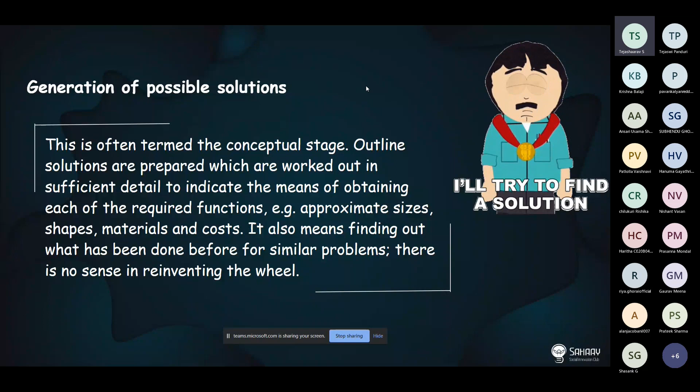It also entails researching existing solutions for similar issues, because there's no point in inventing something from scratch again. If someone has already worked on a solution and reached a conclusion—whether it worked or not, or was successful—it doesn't make sense to put in valuable time and effort into it again. Instead, we could just focus on getting better and more efficient solutions for the same problem statement. So we should look into the previously existing solutions as well.

Here, our problem statement is waste segregation, which we discussed in the last session. Now we'll look at the possible solutions for the problem statement: manual segregation, recycling or waste management applications, weight-based sorting, sensor-based sorting, and sorting with artificial intelligence and machine learning.

We'll look into the pros and cons of each solution—why this solution was considered, why this wasn't considered—in order to select the best one according to our desired specification. Then we'll have a mini brainstorming session if you have any other solution in mind.

All right, so now we'll just analyze each solution here and see why this is or isn't the best solution. We'll see both the bright sides of it, and then why this wasn't considered—the part that isn't favorable or suitable for our problem statement.

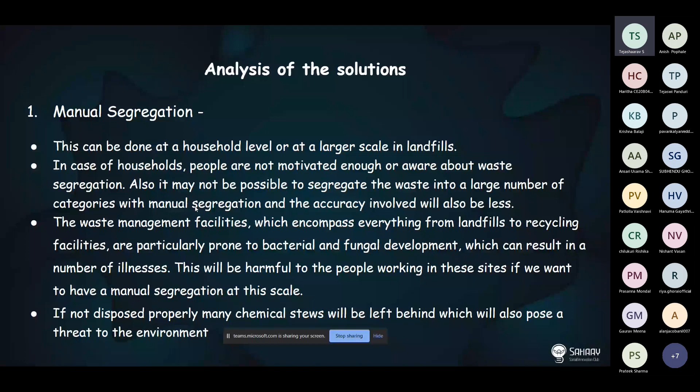So this is kind of like an extension to the previous solution. Here, though, even though the collection is done manually, you're just giving it away to people, and then you get something as a benefit - you get some incentives out of it. So this one's a slightly better extension for the previous solution, kind of.

And then again, it doesn't involve much tech, except for the application. And why digital? To just keep track of it, of course. And then it's easier - easier online. And it also motivates people to do it.

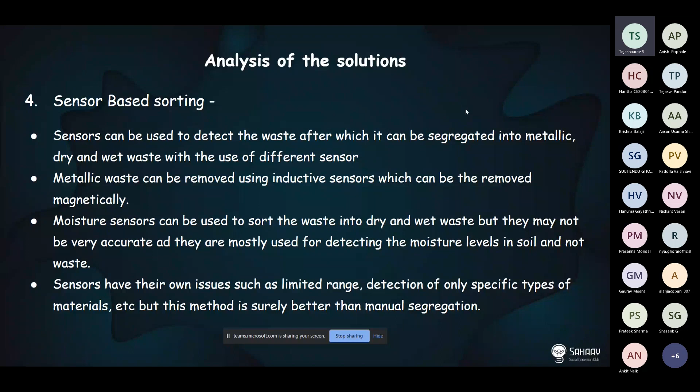So the accuracy is going to be higher if we implement better algorithms. Compared to sorting using sensors, this one's of course more accurate, because that one's got its own share of range problems, and we can only categorize into a few. The categories are limited, and its accuracy is good, but the categories are limited and it's got its own share of drawbacks as well. Compared to sorting using sensors, manual segregation, and all the methods we discussed before, this one's of course better than the previous ones.

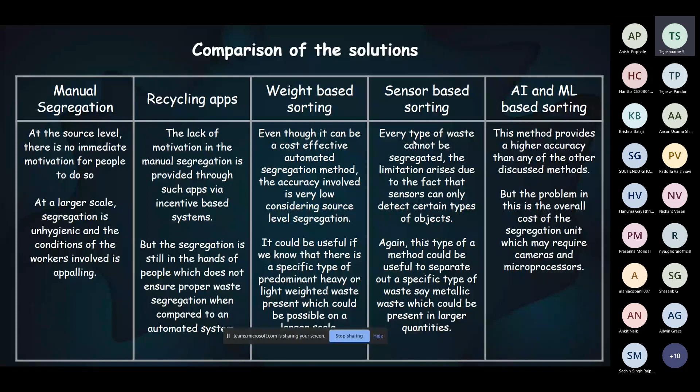So we have discussed some five different solutions which we thought of. Is there anything from you guys, like some possible solution which you can think of? Maybe we could have a small discussion on that before moving forward. Any more solutions other than this? Then we can go to the comparison of all those solutions. We can have like 5 minutes, or 3 minutes for you guys to think about it, and if there isn't anything, we'll just move on.

Can you please repeat? We're just asking if you got any other solution, any other idea, apart from the ones which we have discussed right now, and we can have a discussion on that as well. If not, why this one is not feasible, what could be the pros and what could be the cons. So we'll just give you 5 minutes, think on it, and then we'll discuss and move forward.

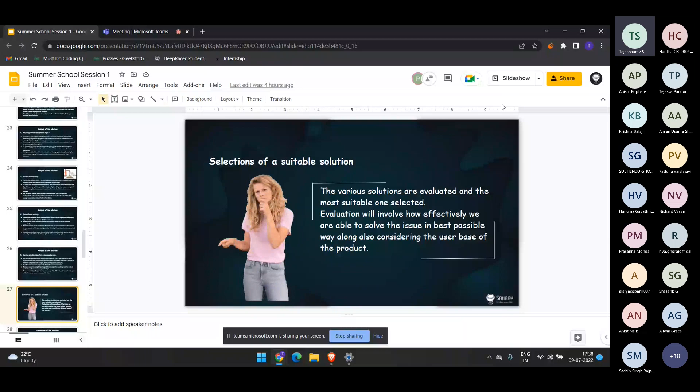All right, I guess it's 5:30. Rani, let's just check if there's any solution, if there's something on the chat box. No, there isn't anything in the chat box, but if any of you guys would like to speak up, if you have anything, any solution, then we can discuss about it, or else we'll move ahead. You can just put it in the form which will be circulating after the session, if you have any ideas which we could consider.

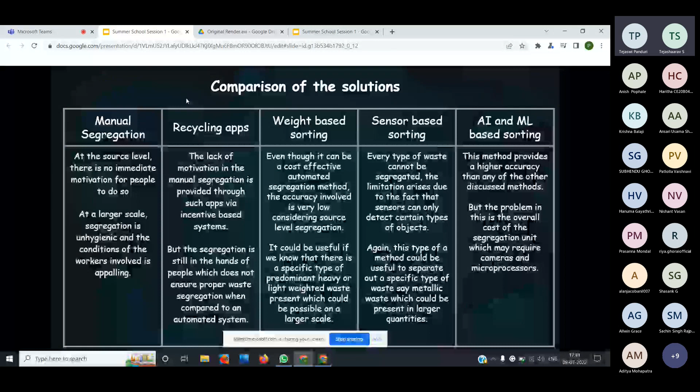At source level, like in households and all, there is no immediate motivation for people to do this kind of stuff, no immediate incentive. But at a larger scale, manual segregation is unhygienic, and the conditions for workers involved in the process are awful. It's not comfortable for them to segregate large amounts of waste into different categories. It's hard for them and very unhygienic. So manual segregation is a bad choice for segregation of waste.

Next one, recycling apps. The lack of motivation in manual segregation is provided through apps via incentive based systems. It is provided, but it still has to be done by people, which does not ensure proper waste segregation. It's not that effective when compared to an automated system. We can consider this as a suitable solution, but in large amounts, it's obviously not a suitable solution.

The next one, weight based sorting. As the name suggests, it segregates and categorizes the waste based on its weight, but it's very less effective. Even though it's the most cost effective one, the accuracy is very low considering source level segregation. It could be useful for large amounts of waste, since if the weight difference between the particles involved is more, we can easily separate them, so it might be helpful at a larger scale. But it's not that effective in a household system at source level, because biodegradable and non-biodegradable waste can have the same weight, so it's not that accurate.

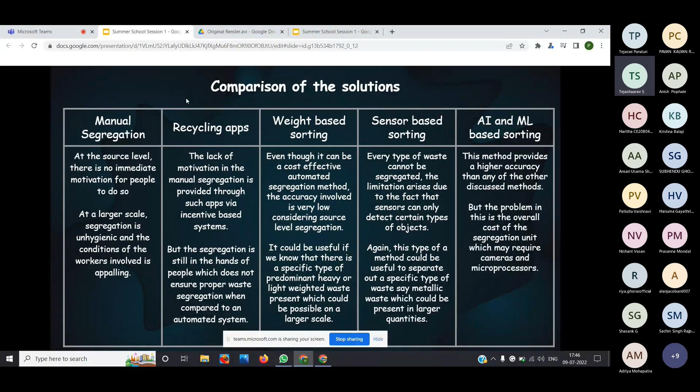So anyone want to add a comparison between these discussed problem solutions? Anyone? If anyone wants to share your thoughts, you can just speak out, otherwise you can mention it in the chat.

Let's move on to the next slide then.

Moving to the next part, it's not like the processes mentioned in the design process are strictly in order. They don't just flow stage by stage. There will often be a need to return to an earlier stage and give further consideration. Sometimes we have to go back to the earlier stages and analyze again, sometimes to the analysis part to get the correct solution, and sometimes we have to go back to specify things, back to the specifications part to specify what we need. It's not like every time we'll be going on a flow in the process; sometimes we need to go back and continue the cycle again.

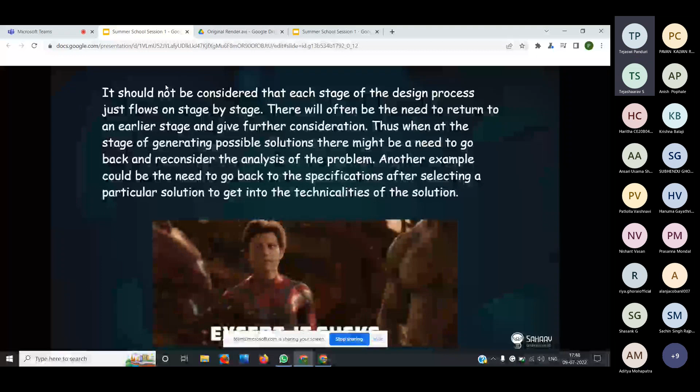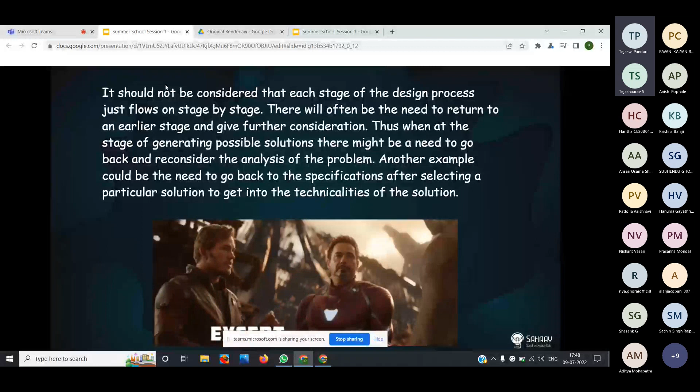So we'll often be returning to earlier stages and giving further consideration. Sometimes we have to reconsider our analysis part and the specifications made earlier. Sometimes the need analysis of the problem, preparation of the specification, then generation, then selection, before creating the production of the design—we have to sometimes come back to the preparation of specifications, sometimes back to analysis of the problem, and sometimes to the generation of problem solutions. We can get new ideas this way, and the design should be unique, not the old idea again, so we have to come back to previous processes and analyze again.

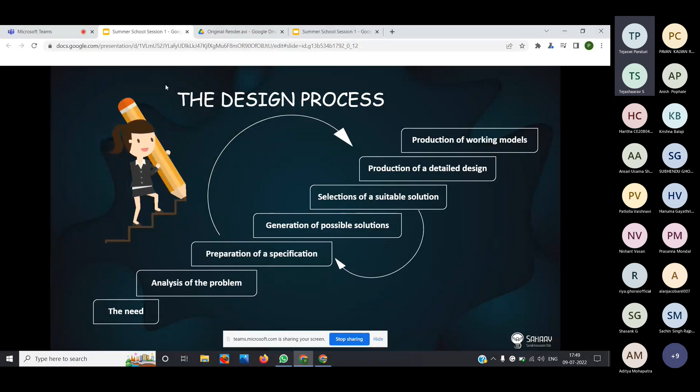So the next part is the proposed solution. Now that we have already analyzed and compared all the possible solutions, the most effective one is AI and ML based waste segregation, because with that we can customize the segregation parts, like the different types of waste we want to segregate and all.

Let's see how it works. We can make a bin that will consist of n sections to segregate the waste into n categories. It will detect the waste into n categories and dump it into the respective sections of the bin. We shall use a camera for image capturing, and that will go into the algorithm—we'll know how it works in more detail later; this is just to give a basic idea. The camera captures the image, which goes into our algorithm, and that decides the category of waste it has to be dumped into. Then a mechanical system puts the waste into the specified section.

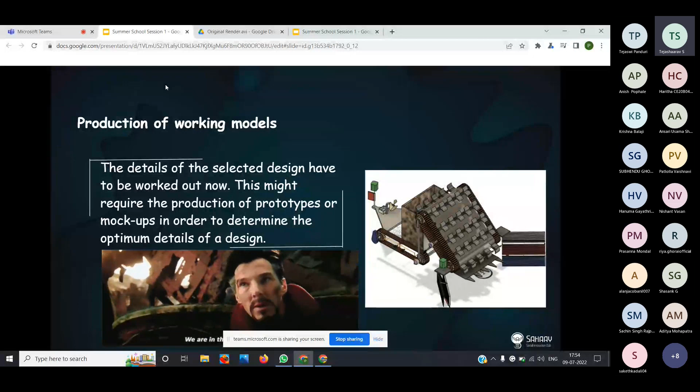So production of working models is basically based on the design we have made. The production of the design is a very important part, which contributes to the making of the physical product and prototypes.

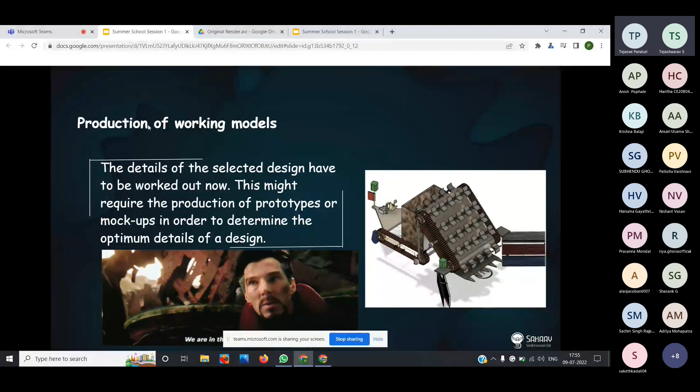Moving on to the next part. Yeah, we have worked on the system.

Our team is one of the only teams from 1 lakh applicants to reach the Singapore finals of the $1 Million Hult Prize. This is a proud moment. We are one of only 50 teams out of 1 lakh applicants. These are the articles published on Chennai Times on 13 November 2017.

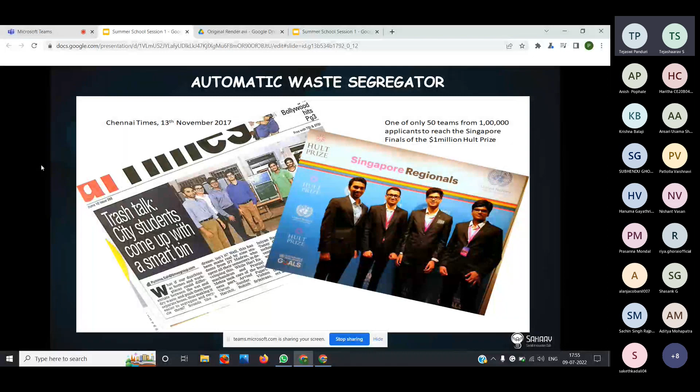Moving on to the next part, design of the AWS. As discussed, we have to make a nice 3D design model and implement the physical model, which requires the following 3 modules. The overall design can be divided into 3 modules: the mechanical module, the electrical module, and the programming module. Let's move on to the mechanical module. This module is the most important one, as it gives the physical model of the product, into which we have to integrate the electrical part and the artificial intelligence and machine learning part.

This module is concerned with ensuring that waste is directed into the correct compartment. We have to design n compartments, which will be analyzed and segregated using the electrical part. With this mechanical module, we will make the compartments and ensure that waste is directed into the correct compartment.

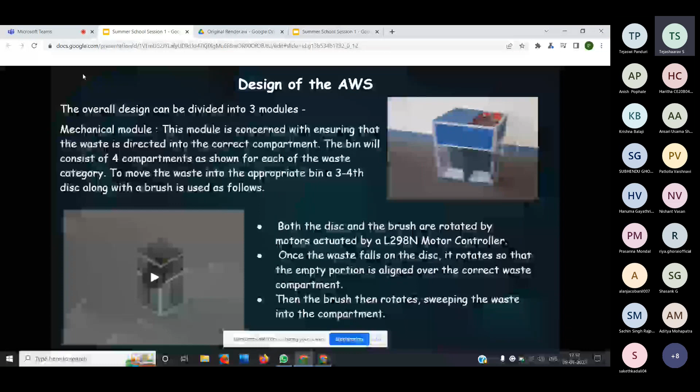The bin will consist of 4 compartments as shown, for each waste category. To move the waste into the appropriate bin, a 3/4 disc with a brush is used. Let me show the video - there is a 3/4 disc and a brush which ensures this. Can you guys see it? Yes. I'll play it again.

So the disc will be rotating. In the process, the waste is categorized into which compartment it should be dumped, and then the brush will rotate to ensure that the waste falls into the provided space. Both the disc and brush are rotated by motors actuated by the L298N motor controller.

Once the waste falls on the disc, it rotates so that the empty portion is aligned over the correct waste compartment. Then the brush rotates, sweeping the waste into the compartment.

So as we see, first the disc rotates, which aligns the compartment into which the waste should be dumped, and then the brush rotates, ensuring the waste falls into the correct compartment. So this is the contribution of the mechanical module.

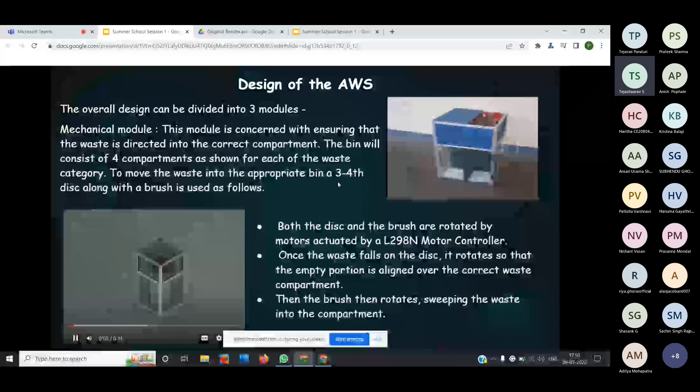So the next part is electrical and sensory. This primarily deals with the control and sensory information of the various parts of the prototype, like from the prototype we have obtained.

Like in the mechanical part, first the disc will rotate, then the brush will be rotated. But how is the waste going to be separated and the brush going to remove it?

As soon as the waste falls on the disk, initially the disk rotates such that it aligns over the correct waste compartment, the empty space aligned on the correct waste compartment. Then the brush starts to rotate, which sweeps the waste into the compartment.

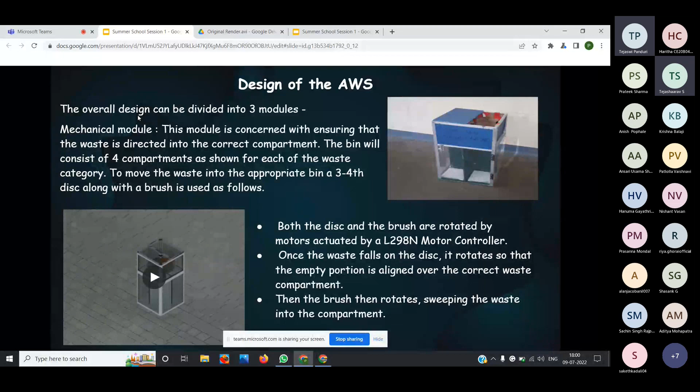And then moving on to the electrical part, have we made the categories of the waste?

Can you repeat it again? Hello? Have we made the categories of the waste? What are the parameters that should be considered while quantifying the waste through AI or ML? I didn't get you, am I clearly audible to you? Yeah, it's not exactly clear. Can you repeat it, am I audible? Yeah, no, it's fine, I guess.

We are talking about the separation of waste, on which parameters we have to depend. Actually, we should apply some parameters to AI and ML. Correct? Yes, yeah.

So the algorithm will be fixed in the electrical and sensory part. What should be those parameters? Image based processing, or the specific gravity of the waste, or which kind of parameters we are going to choose for classifying and segregation of the waste.

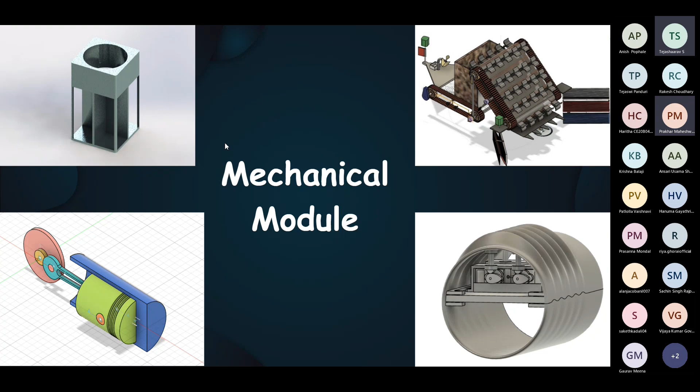So why 3D modeling? Why is it required and why do we want to do it in the first place? 3D modeling is generally used before the actual or physical prototype is built. There are some advantages of doing this process before directly going to build the physical product.

It will help us visualize the product better, and at the same time we can get some insights about some of the physical challenges involved in building the physical product. So those kinds of things can be caught earlier in the 3D design part itself.

Also, changes can be made easily in 3D models. If we directly build a physical prototype and then notice some errors, we need to make changes in it. That's a time-consuming and energy-consuming process, since we need to build those things again.

But in case of a 3D model using any software, it's easy to make such changes. By making those changes and arriving at a final 3D model, it becomes pretty easy to just follow it and build our physical product.

Also, in some cases we may require 3D printed parts for our assembly. For that, a detailed model of our parts is important so it can be properly 3D printed. Some common 3D modeling softwares are Fusion 360, SolidWorks, and AutoCAD.

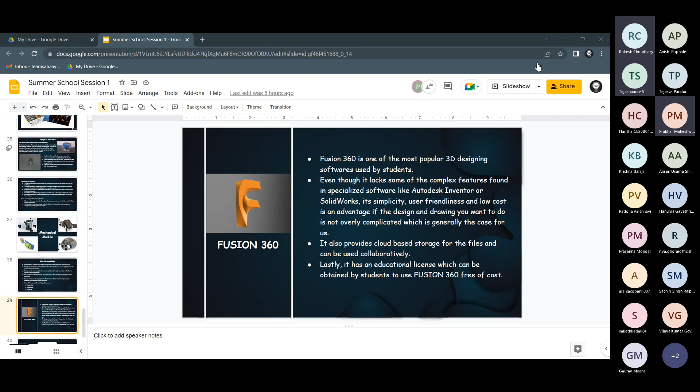Sir, on Tuesday, at what time are you going to organize the same session? 5 to 7, the same time.

If you are not able to join that session, you could also take a look at the recording if you want, or the slides which will be presented. But the problem is that for the mechanical module, there won't be much in the way of slides, because we'll show you how to use the Fusion 360 software itself, not slides.